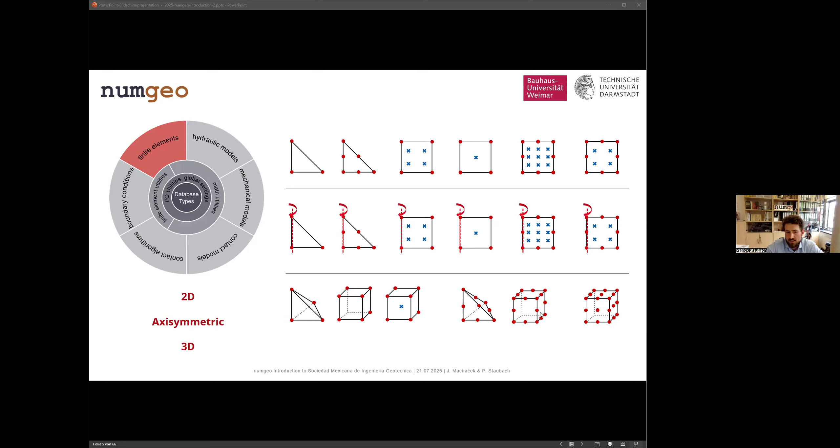For some simulations, reduced integrated elements are favorable. They are also faster, and those elements can then also be supplemented with hourglass stiffness in order to counteract any zero energy modes. On the 3D finite element formulations, we have tetrahedric elements, and we also have hexahedral elements with different interpolation order.

The second important part for geotechnical engineers next to the element formulation is the mechanical modeling that we offer. So we offer a wide variety of constitutive models to be used.

Here at the top, we start with very basic models. Of course we have linear elasticity, and we also have Mohr-Coulomb in various implementations. We have modified cam-clay models, and all the basic plasticity models that are used particularly in practice.

But because we are also a research code, we have more advanced constitutive models. In particular, in Europe, hypoplasticity is very commonly adopted. We have it conventionally with the intergranular strain extension and also with the more recently developed ISA extension.

And then we also have partly the Sanisand family. The Sanisand family nowadays is quite large. We have the basic model from 2004, but we also have more recent developments of that Sanisand model, particular for cyclic and also semi-fluidized states.

And finally, there's also a particular hypoplasticity implementation for unsaturated soils. This was now the advanced constitutive models for non-cohesive soils. In the green box, you see those models for cohesive soils.

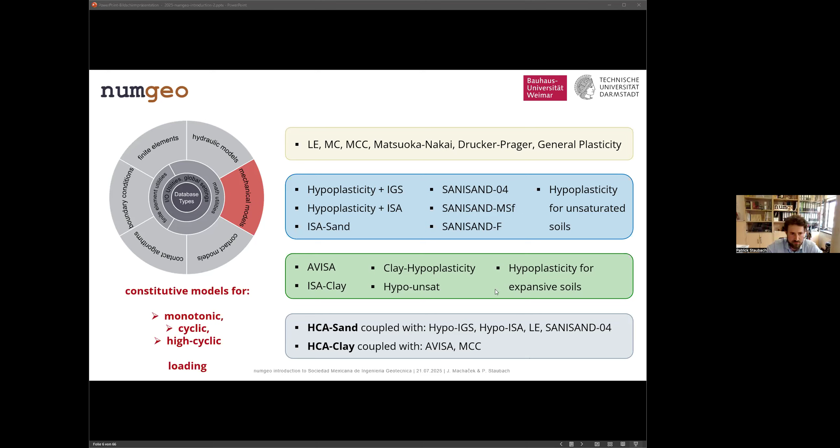The next thing that I want to discuss are hydraulic models, which you would need when it comes to modeling of unsaturated soils. In this case, you have to describe the soil water retention curve, and we have a number of models which you can adopt to supplement this constitutive relation. At the same time, you have to account for a relative permeability. So if you have unsaturated conditions, the hydraulic conductivity of the water through the skeleton will be lower, and there are also a number of models to consider this.

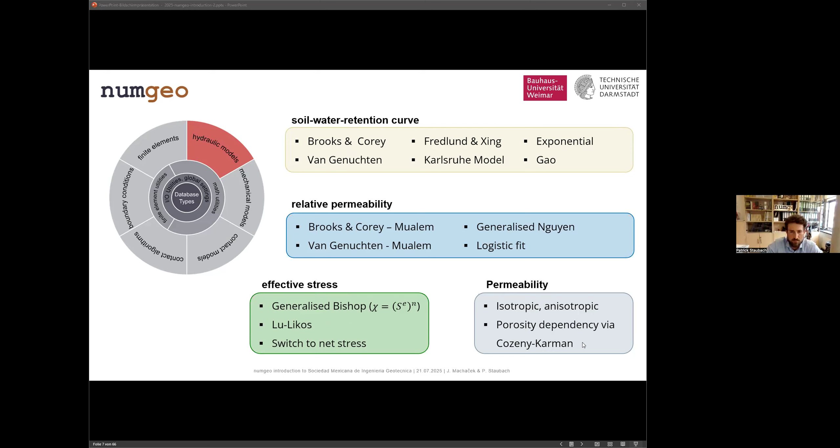And finally, you also need to account for the effective stress formulation if you have unsaturated states, to account for suction. There are also a number of models from which you can choose in that software. Finally, in terms of permeability in general, we have implemented a porosity-dependent equation by Kozeny-Karman to account for a reduction of permeability if, for instance, porosity decreases when you have some volumetric strain leading to compaction.

Important aspect of finite element simulations are interactions. So we do allow in NumGeo that multiple parts of your computational domain are interacting with each other. And we allow for large deformations between objects and also arbitrary meshes between the objects. So we are not like Plaxis limited to very simple spring interaction between nodes with some discrete interface elements, but we have state-of-the-art contact discretization methods for this.

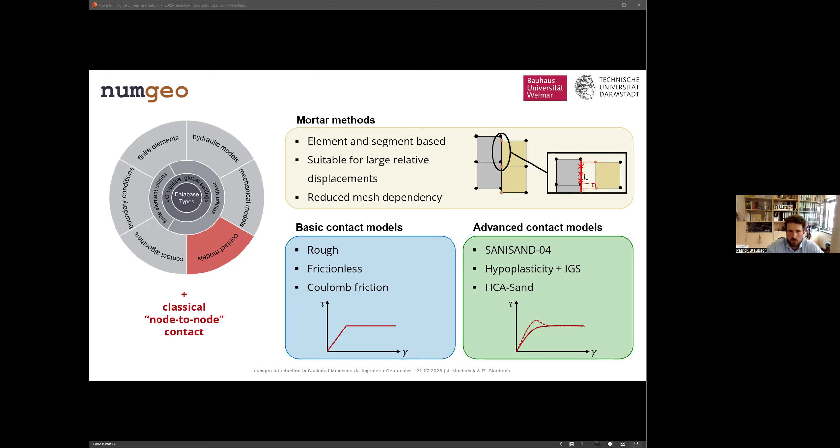Finally, we also want to say a few words about boundary conditions, but we don't want to cover it all here. We only want to highlight a few aspects of the codes, because boundary conditions are quite a broad topic.

What we offer built in is the generation of random fields. They follow a Markov correlation. What you give is basically the minimum and maximum value of some field that you want to spatially distribute, and the correlation range. The correlation range basically determines, over a certain distance, how large the correlation is of the values that you are distributing.

We have that built in, but we also have it externally by means of Python codes, so I will come to that in a second. With NUMGEO, you can also read in arbitrary initial conditions. You could generate these random fields with an external script, say a Python script, and then import it into NUMGEO.

The Python scripts that we are also offering allow a little bit more flexibility, for instance cross correlations, if you want to link the friction angle somehow with the initial density.

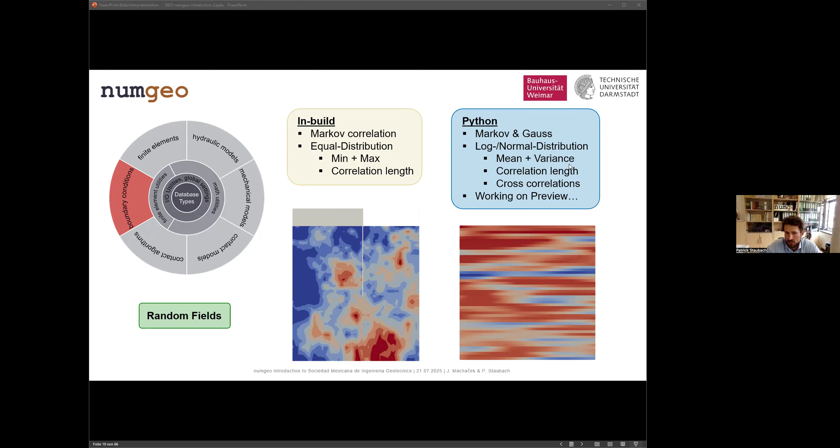If all of this is not enough for your application, we do allow you to modify the code with user subroutines. User subroutines allow you to basically program your own code and have it incorporated in our pre-built program. Let's have a look here at which routines you might want to modify.

We offer the modification of the material. You are allowed to completely code your own user mechanical model, and the interface, if you are familiar with Abaqus UMAT, is very similar to that interface. It's also possible to link it with user subroutines that have, for instance, been programmed in Fortran.

You can also do that for unsaturated conditions, and you can also implement your own user contact properties. For instance, if in one part of your model you want to use a different contact friction angle than in another region of your model, you can do that very flexibly with user contact properties, where you have some dependency on coordinates.

An important aspect is the initial state conditions. We allow users to define initial states, initial stress, initial void ratio through user subroutines. For instance, consider the initial stress conditions on a slope. We don't have a pre-built initial stress condition for that. You could basically apply gravity and then the stresses will come into equilibrium, giving you a stress distribution which is in initial equilibrium. But you might also want to initially define the initial stress conditions for a slope, for which you could use this user initial stress routine.

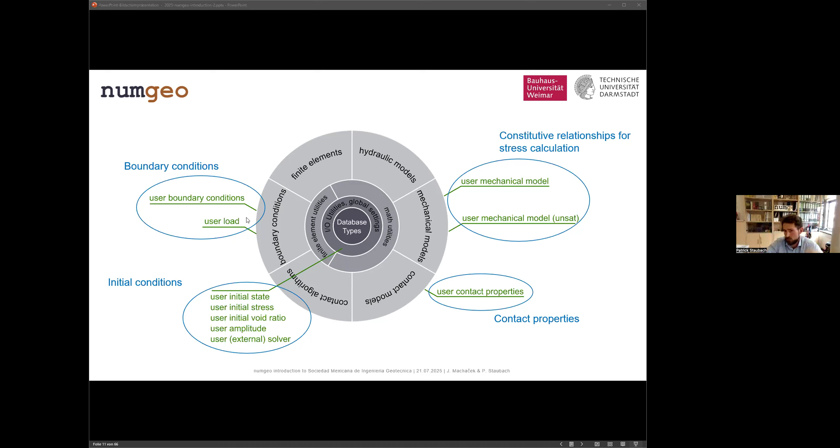Now let's come to the actual application of the software. As it currently is, we are offering the software for Windows and also for Ubuntu, where more Linux-based operating systems are pending. In Windows, you have two different options to adopt the software.

We offer a portable version. The idea is you don't have to install anything. If you download it from our website, you get an executable, that's the NUMGEO software, and we ship a number of DLL files with it that you need to execute NUMGEO. There are about 10 of these DLL files, and they have to be located in the calculation folder where you execute NUMGEO. If you get tired of always copying the executable together with the DLL files, you can also put a system variable in your system path so Windows always finds them directly.

This portable version is very nice because you don't need to install anything, and it doesn't require any space on your system. The shortcoming is that the user subroutines I presented on the previous slide require a compiler. If you program something, you have to compile it in order to have it read by NUMGEO. In this case, you might use an option like MinGW, which works as well, so you could compile these user subroutines with MinGW and then NUMGEO can read it. But if you don't have that, you cannot use user subroutines.

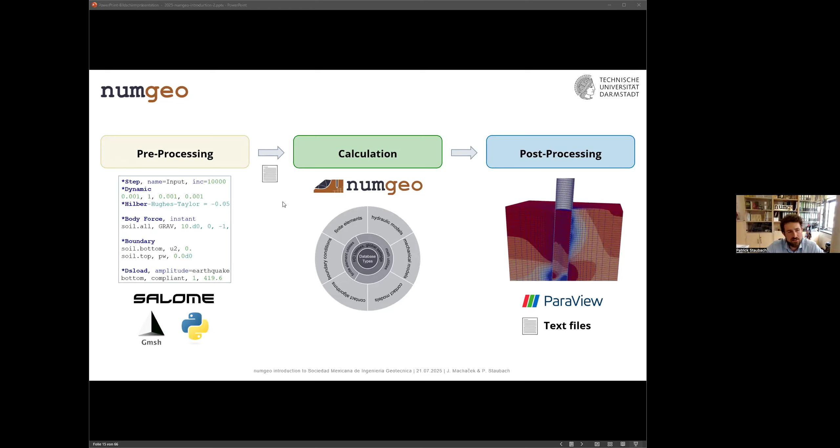We know that this kind of pre-processing can be unhandy, which is why there is NUMGEO GID. You might be familiar with GID - it's a very powerful CAD and mesh software, and it also allows you to incorporate program-specific commands and keywords into the software.

So what was done is that in GID there's a program type which is NUMGEO. From our website, you can download this program type and incorporate it in GID, and then in GID you can do a guided pre-processing. I'll show in a second how that works.

The rest of the steps remain the same, but you can do the simulation or calculation directly from GID. You can start the simulation in GID, get information about how your simulation is going, and at the end, you can also visualize it with GID.

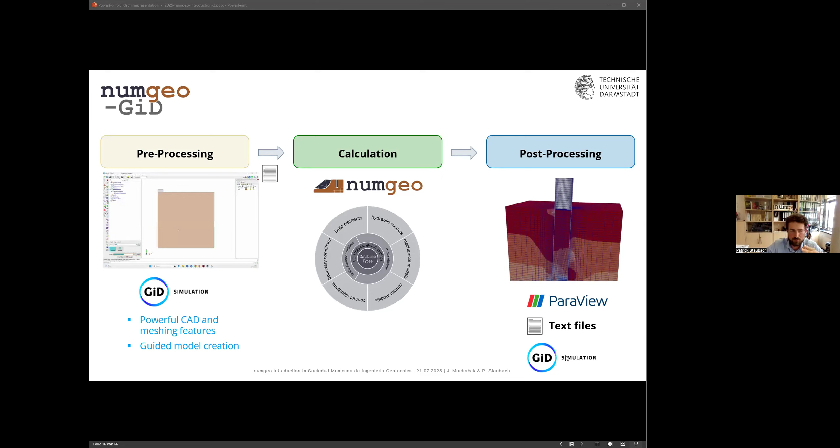Here is the program interface from GID, and you have different sections of that interface. You have the data tree, and in the middle, in the sketch area, you have the model you have generated. GID works with layers and groups, which you can activate and deactivate - for instance, to deactivate the soil here to only have a view of the pile area.

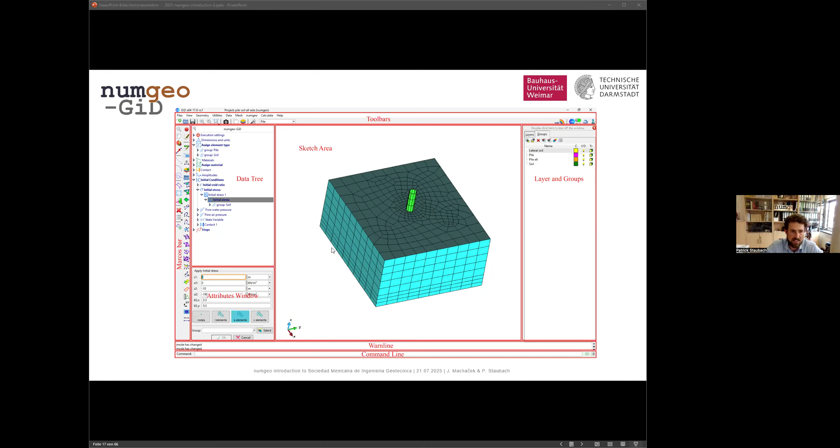In this data tree, you are guided through the generation of your finite element model - all the steps we've discussed now from an implementation point of view, so for instance element type, material assignment, it's all guided. You cannot do as much wrong as during this input file setup.

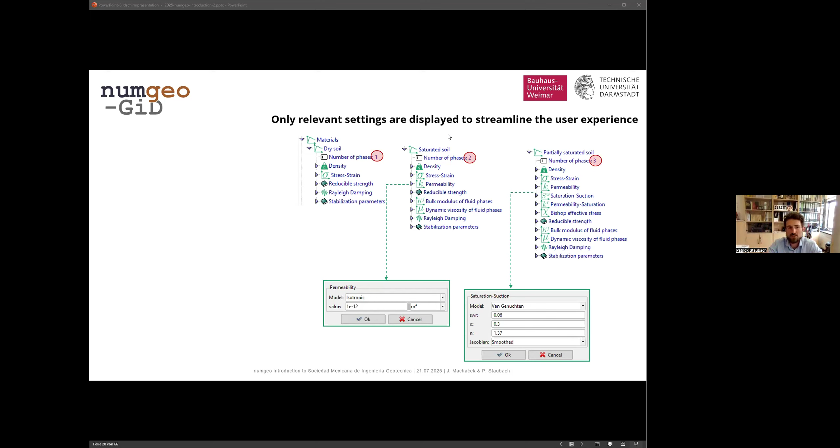Each individual topic has smaller sections where you can do a lot of fine-tuning of the different settings, and this really enhances the user experience. Only relevant settings are displayed at the beginning in order to streamline the user experience, so you're not faced with hundreds or thousands of options without knowing if you have to fill them out or not. At the start, it's all streamlined for the user.

Then you have assisted generation of material definitions and initial conditions, for instance. Here's an example: if you've picked hypoplasticity plus intergranular strain as the constitutive model, then the list of parameters you need for that constitutive model is given to you directly, so you're not missing to define any of these parameters.

There is also transparent access to more advanced settings, like if you want to change the solver selection, or what you probably want to change very rarely, the convergence criteria. It's modifiable, but technically you never really need to modify the convergence criteria.

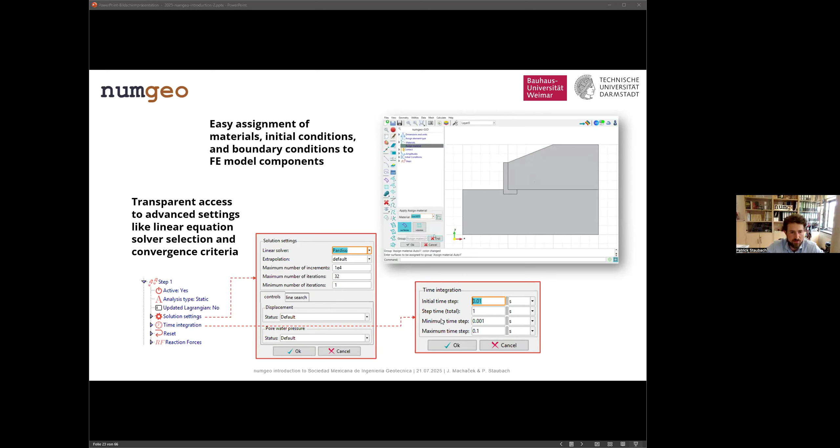Now in August, mid of August, we are planning a new release. For instance, in this release we will include structural elements. This is a very basic feature which we didn't have up to now. So beginning with August, there will also be structural elements available. There are general modifications, and there's also more content added to the manuals, and normally there are also some bug fixes, which we report there.

You can find the full release history also in our documentation. So for each of these years and months, there's a list of changes which we did to the software, so you can keep track of the changes that we did, and maybe you also need to react to those changes when you download a new release but want to use old input files.

Now let's come to some ongoing developments, particularly with an aim on research. The idea here is also to show you some capabilities of the software that we currently have, and then we will follow that with application examples.

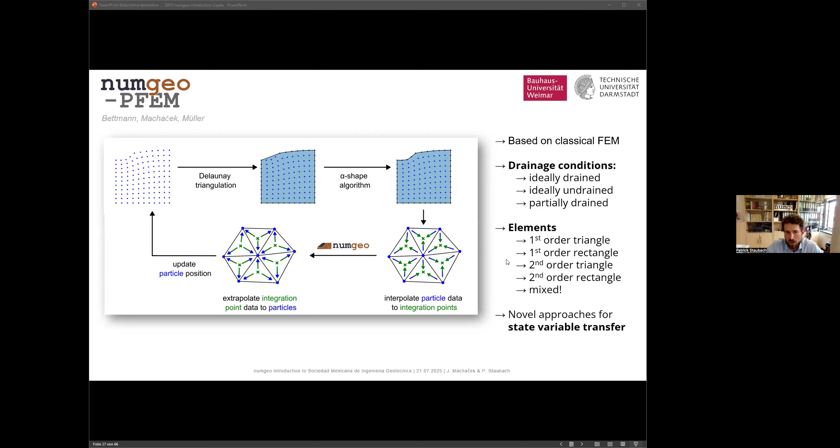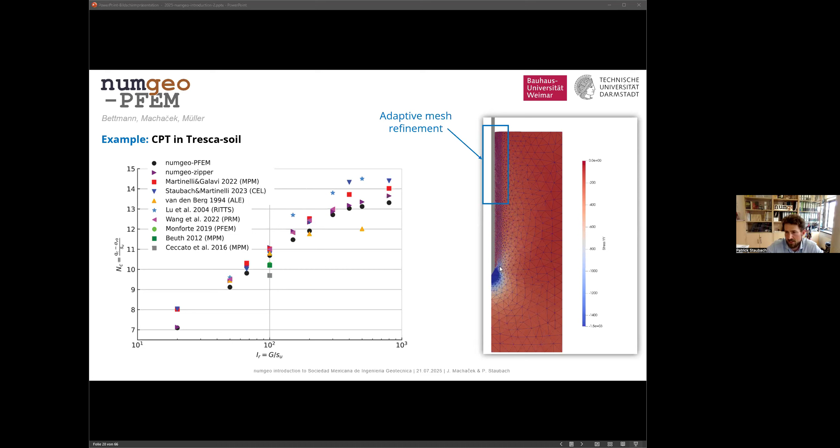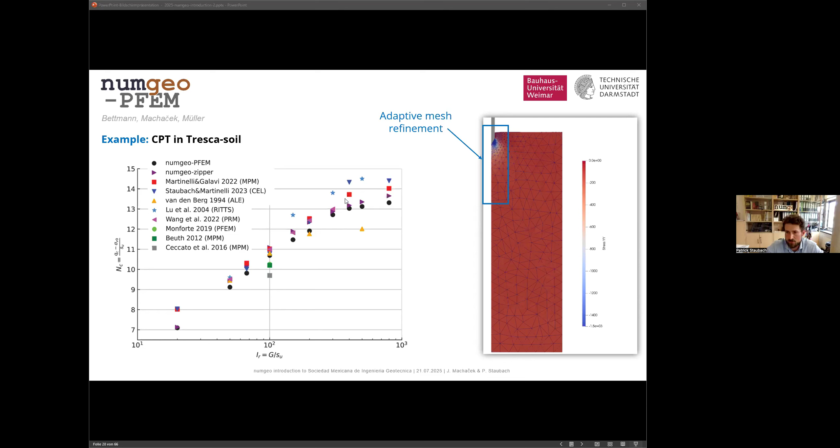And here we have plotted a number of researchers with various codes for large deformations for this type of simulation. We compared the PFEM method with the so-called zipper method, both implemented in NUMGEO, with various other solutions. The zipper method I will introduce later; it's also performed in NUMGEO, and it's another way to simulate this problem where no remeshing is performed. We compared that with the material point method and also the coupled Eulerian-Lagrangian method, and found very good agreement between the NUMGEO solutions and the other codes.

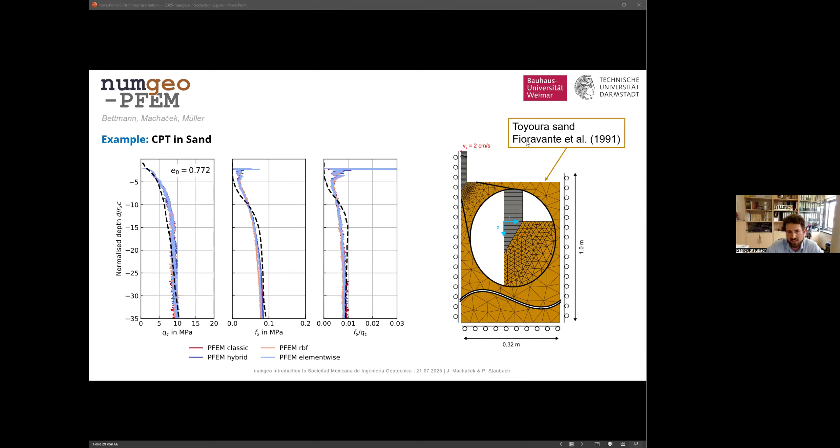Here is a comparison for the cone penetration test in sand. We see here with depth the cone resistance qc and also the friction ratio Fs, and the different implemented schemes for the PFEM method are compared, and they all have very good agreement with model tests from 1991, as depicted here on the right side.

Now coming to a totally different topic. We are now moving away from the PFEM to NUMGEO ACT. ACT stands for Automatic Calibration Tool, and it's a software used to calibrate constitutive soil models. It calibrates the parameters of constitutive soil models by means of an optimization algorithm, so it's completely automized in the way that the software tries to find an optimal solution for the parameter set.

Here it's displayed how this works. You need to have your experiments, of course. The experiments could be odometric tests, drained or undrained, monotonic or cyclic triaxial tests, or they could also be shear tests. Then we first adopt some constitutive model - it's more or less arbitrary what you pick here. It could be hypoplasticity, it could be Sanisand.

We first estimate a set of parameters, perform a simulation of the tests in the data bank, and then compare the curve from the simulation with the test from physical testing. Then you need to quantify the difference between the simulation and the test. There are different ways to quantify that, and a number of different methods implemented in this ACT method. You then calculate a weighted error, and eventually set some error tolerance. If your current error is below the error tolerance, you have your final set of parameters, and hopefully it fits very well. Otherwise, you have to optimize the parameters.

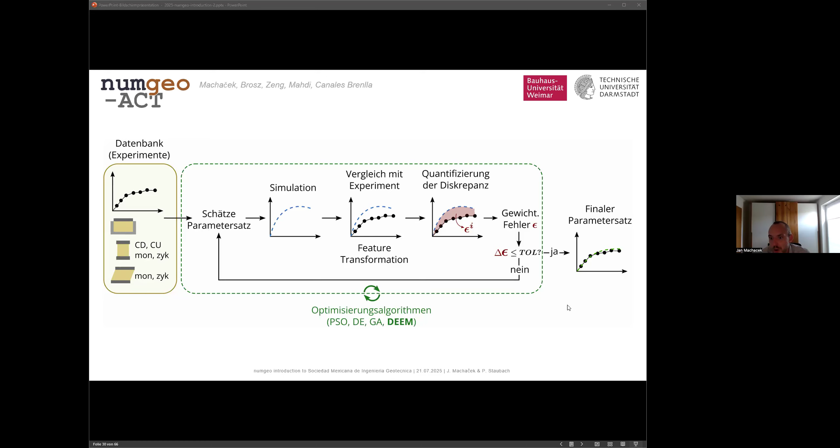So if the calibration or optimization algorithm finds a suitable parameter set at the end - this is determined, for example, if we fall below a threshold in terms of the cost function value, denoted here with delta epsilon - then we deem the calibration to be finished, and we think that we found an optimal parameter set. So now you could switch the slide, please. We have one example for you to showcase that a bit. If you go back, please, one slide - that was one too fast.

For one specific material, a fine sand, we have multiple tests: an odometric compression test, drained monotonic triaxial tests, undrained monotonic triaxial tests, and cyclic undrained triaxial tests. For each test type, we have multiple different experiments.

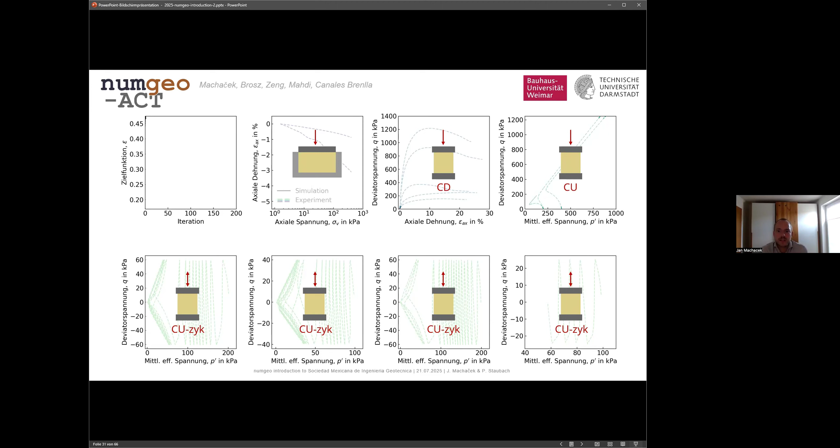Now we are looking for the one parameter set for the hypoplastic model that fits best all of the experiments. This process is shown on the next slide, where you see the progress of such an automatic calibration, with the drop in the cost function.

The cost function quantifies the difference between experiment and simulation. Simulation results are given in black curves, and experiments are given in dashed colored curves. A high cost function value denotes a rather bad fit between experiment and simulation, and the lower the cost function gets, the better the agreement between both.

At the end of the calibration process, we have quite a good agreement for monotonic tests like the odometric compression test, but also for the cyclic tests given in the bottom row. Now obviously this is the element test level, and the question is how well do these automatically calibrated parameters perform in boundary value problems? That is shown on the next slide.

We tested this approach on different boundary value problems of different complexity. The first box shows the monotonic horizontal loading of a single pile. The second box shows an embankment of saturated sand excited by an earthquake loading at the base. The third box on the right-hand side gives a sheet pile wall, also loaded by an earthquake loading.

In all three cases we performed numerical simulations. The black lines in these plots showcase the measured data from the experiments, and the colored lines give the simulation results. For example, for the single pile, there are multiple simulation curves, because we repeated our approach for the whole calibration up to 50 times to see if our approach is robust in terms of the prediction.

For 50 different calibrations, we get nearly the same result in terms of the predicted outcome in the boundary value problem, which shows that the framework and the process we developed here is rather robust.

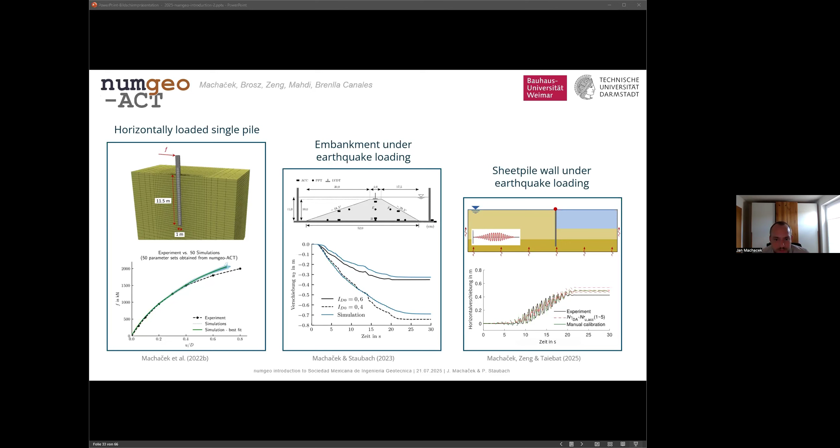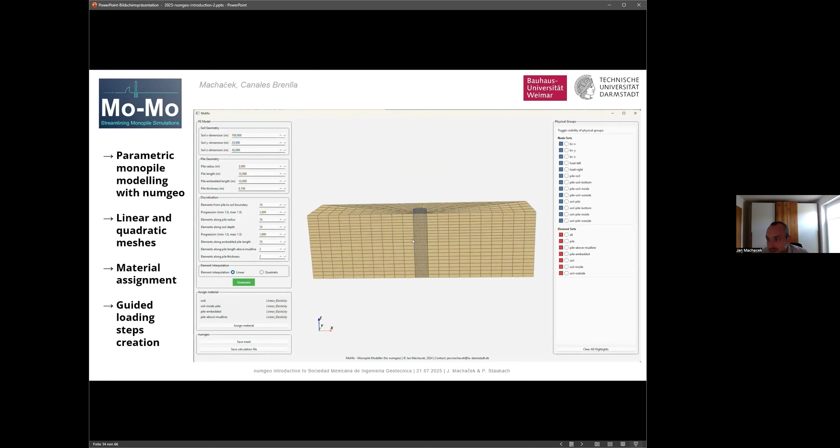As you might have seen so far, the NUMGEO framework was developed in terms of text-based inputs. We started also interfacing it with the GiD software for graphical pre- and post-processing, but there are some tasks that can be further optimized, for example for monopiles, especially in the context of offshore geotechnics.

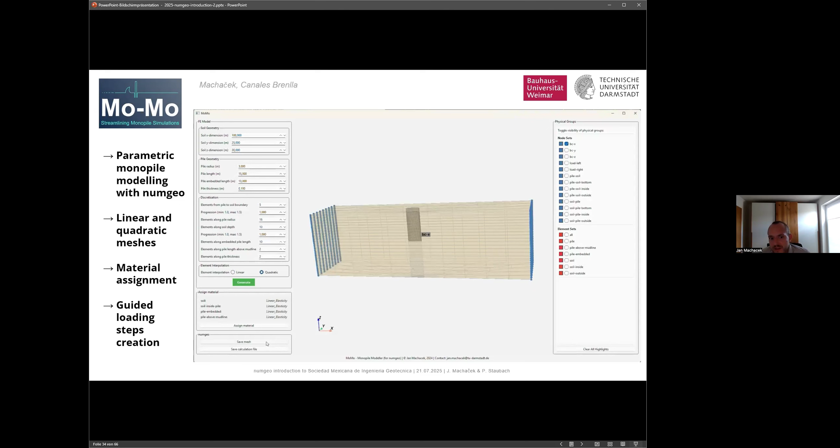We are interested in how the pile deforms under several thousands of loading cycles, maybe up to millions. In this case, the numerical models themselves are, geometry-wise, rather simple, but creating and meshing these models might take some time. So we created an application that allows you to do that parameterized, and to quickly, in a matter of minutes, create such models for monopiles.

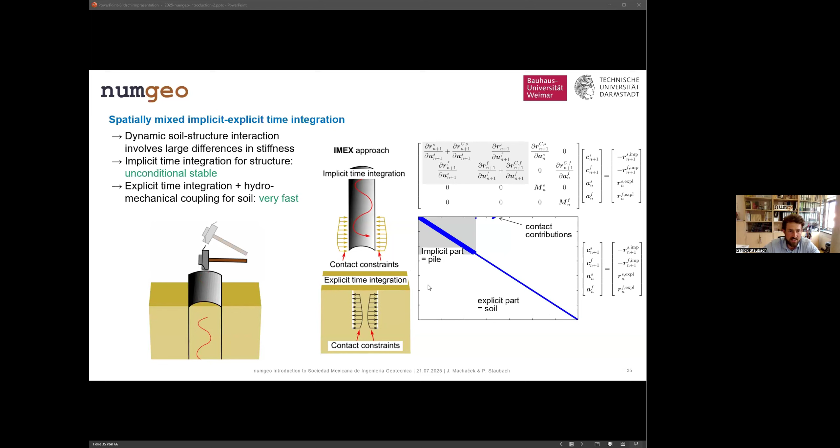We have compared the solution of this IMEX scheme for dynamic pile testing, and we found very good accordance between full implicit time integration and this IMEX approach, both in pile displacement and in pore water pressure distribution or development in the soil. The speed up is a factor of 10 to 100 compared to a full implicit simulation.

What are further applications? This is not only relevant for pile dynamic loading, but also if you want to simulate earthquake analysis with soil structure interaction. This comes in really handy, and you can consider the self-deformations of the structure in the soil.

And in general, for large-scale soil structure analysis, one should really consider relying on explicit solutions, because they are so much faster - the solving process literally takes no time.

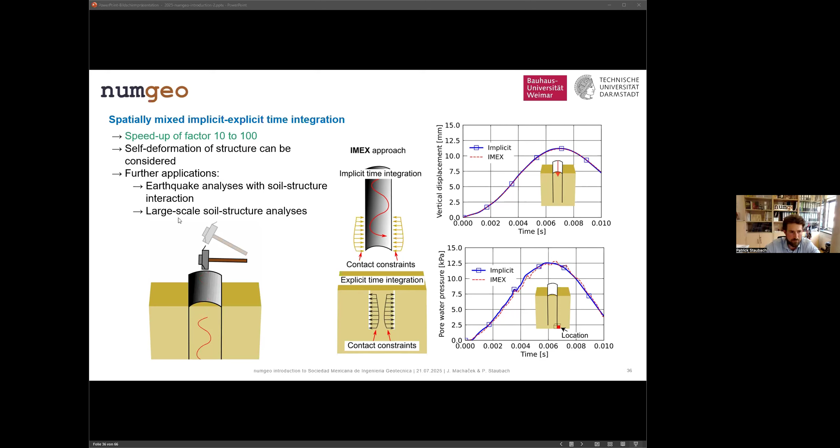Then finally, in NUMGEO you can also do some kind of discrete analysis. We have not implemented a conventional DEM algorithm, but we have implemented a so-called finite discrete element method.

In the finite discrete element method, we make use of those sophisticated contact discretization schemes, the mortar methods that I introduced earlier. They allow so much flexibility that you can technically perform such analysis with a very large number of particles interacting with each other.

But each particle is individually connected with finite elements. So basically, it's a finite element analysis with a lot of individual particles interacting through contact discretization schemes. Why do we do that?

Well, you can model arbitrary particle shapes, as you see here in the animation, and you can also adopt constitutive models for your particles. The particles can have plastic deformations, and they can have some effects of grain crushing also incorporated.

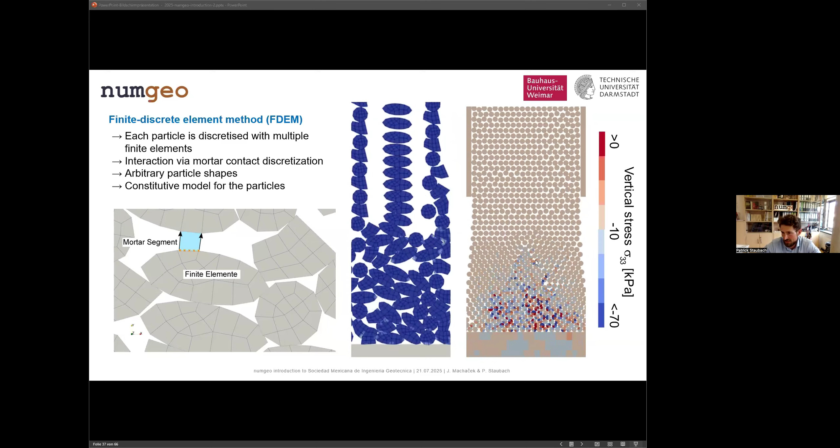And we are analyzing stresses. Here on the right side, you see that in a simulation with thousands of particles, we can analyze stresses in particles, which is very attractive for the interpretation of lab tests, for instance.

Now we want to come to more application examples to further show you the capabilities of the code. First, we want to introduce some back analysis of vibratory pile driving that we did.

Then we adopted the different finite element formulations we have implemented in NUMGEO. I initially introduced the UP element formulations, and I said they are lacking some of the features of the UPU element formulation. In this case, the problem with the UP element formulation for this particular boundary value problem is that it neglects the relative acceleration between solid and water phase, and this is very relevant for high frequency problems, as in vibratory pile driving.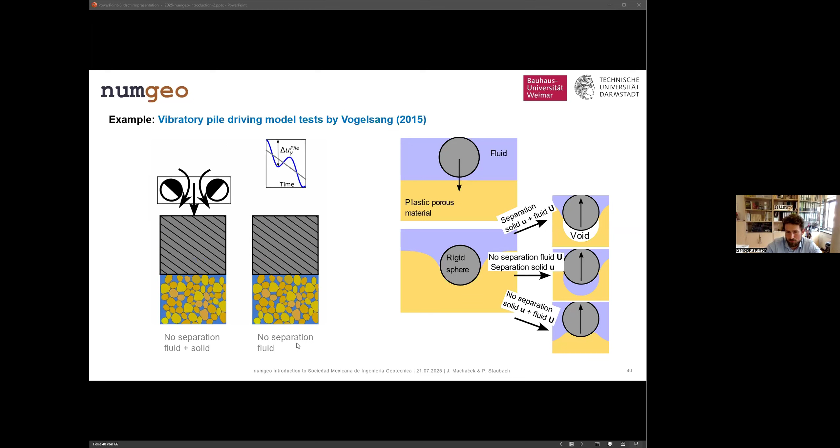For this, we have implemented a multi-phase contact formulation where you can enforce only the water to not separate from the structure. This actually matters a lot for the simulation, for instance, of vibratory pile driving.

Here we see again the pile displacement with time of vibration for the first 12.5 cycles. Our simulation in red, where we enforce the correct contact conditions, converges very well and fits the experiment reasonably well. The simulation where we consider no separation conditions between the fluid and the solid, which is what you could do with all software out there, does not converge well.

We can also show micromechanically, on the right side, that enforcement of the contact constraints matters a lot. We see around the pile tip incremental deformations of the solid grains, obtained with high-speed camera. During the uplift phase, these colored lines show the displacement that the solid grains undergo. The formulation where we coupled grains and water at the pile overestimates the solid displacements, but it does not in the case where we only couple the water phase, because there the grains aren't forced to move upwards with the pile. So it is a modeling choice of great relevance for some problems.

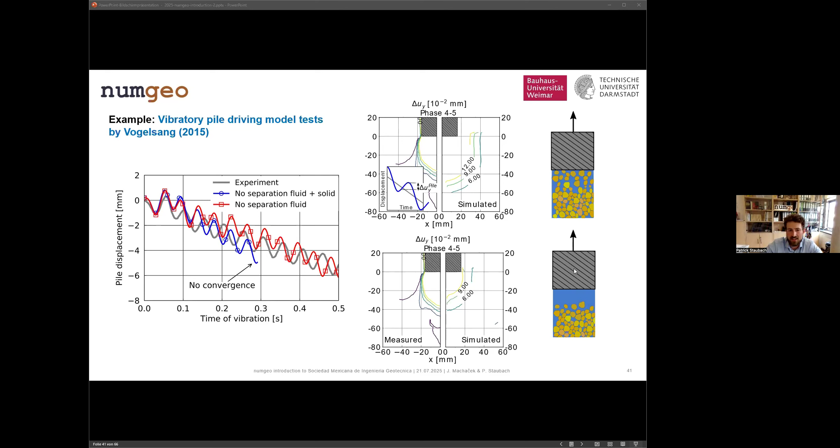How do you account for multi-phase interfaces? This is something you can do with the software. It's also relevant for suction caisson foundations for offshore wind farms.

Here, the suction caissons, when subjected to tension, also lift up. And once again, we have the question of how to model this uplift. Conventionally, with UP element formulation, you can only consider that the mixture moves up with the suction caissons. But in reality, a water gap forms, and you can consider this with the UU and UPU element formulation.

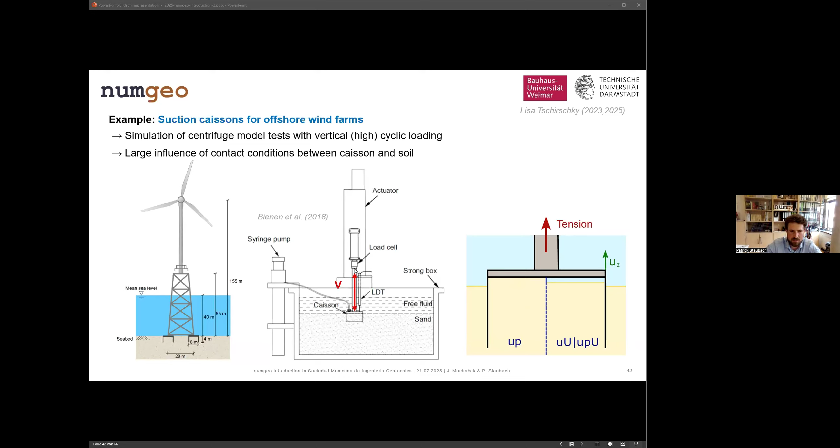We can show that only with the elements considering this gap formation are we able to somewhat predict the results of the centrifuge test. With the UP element formulation, you are not able to get that uplift behavior correctly during cyclic loading with thousands of cycles.

Another application, which I will only go briefly over, is ground improvement by deep vibratory compaction. We do this very often, particularly here in Germany, where loose granular soils are compacted with such a vibrator. It's a very complex problem where thousands of cycles are imposed with this vibrating probe. With the HCA model for high cyclic loading in NUMGEO, we established a numerical model with which we can model the full process of deep vibratory compaction, estimating the densification and the area of densification around such a probe.

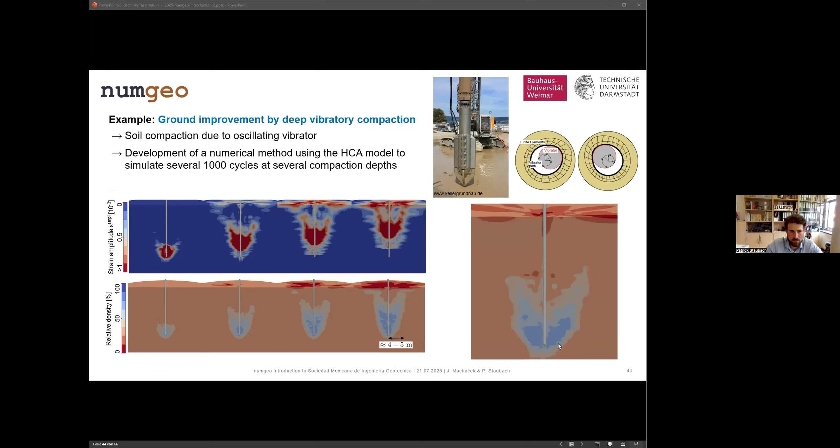To show you the application of discrete modeling in NUMGEO, we are simulating the installation of stone columns with this method, whose advantages I have already explained. The idea is that the installation of gravel into soft clay considers the installation process, where the method allows the particles to interact with the surrounding continuum, which is the weak soil. For the weak clay soil to be improved, it does not make sense to model it discretely, so we only model the particles discretely.

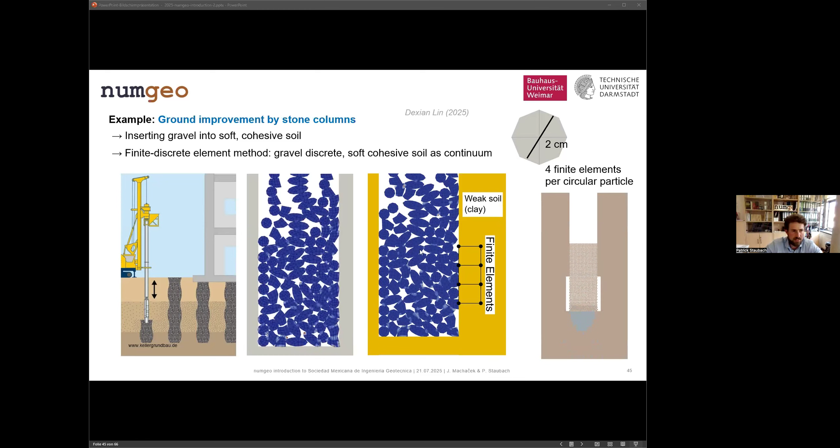What we also do with NUMGEO is modeling of infrastructure loading, for instance by trains. Here is a 3D simulation of train loading over a discretely modeled track, and we have millions of cycles that we have to consider here.

We consider these millions of cycles with the HCA model that I introduced initially in the presentation, and we've also compared such simulations with measurements made here in Germany.

Here's a train line, one of the most strongly driven train lines in Germany, where measurements were made over a span of 5 years. It was approximately 200,000 cycles that the soil faced, and the measurement was made alongside the layer in the soil, so we see the distance from the track and the corresponding settlement.

Because in our analysis we did not really know the speeds of the trains, we did different analyses with different speeds. Eventually we were more or less able to capture the settlement analyses that were taken between these 5 years.

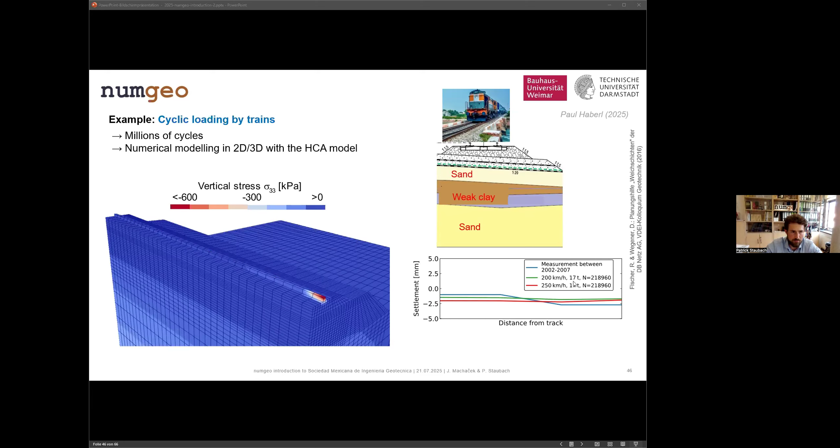Coming now more to the problems we want to discuss at the end of the presentation: Christoph Schmüdderich, who also contributed a lot to NUMGEO, did his PhD on slope stability analysis in residual lakes subjected to earthquake loading. We have this problem in Germany because our coal mining is coming to an end.

These open pit mines will then be filled with water, and we get such residual lakes. The problem is that during coal mining, the soil has deposited in a rather loose configuration, and we do have some chances of earthquakes, also in Germany. So we have to make sure, because those residual lakes are rather large, that no landslides will occur.

NUMGEO offers the possibility to do these dynamic analyses fully coupled with consolidation, with effective stresses, and Christoph Schmüdderich has enhanced this by calculating the factor of safety during this earthquake event.

He calculated this factor of safety by doing a strength reduction analysis and, during the earthquake, calculating factors of safety. Here we see during the application of the earthquake signal how the factor of safety, which is initially very large, drops because of the earthquake, and at one point it even drops below 1.

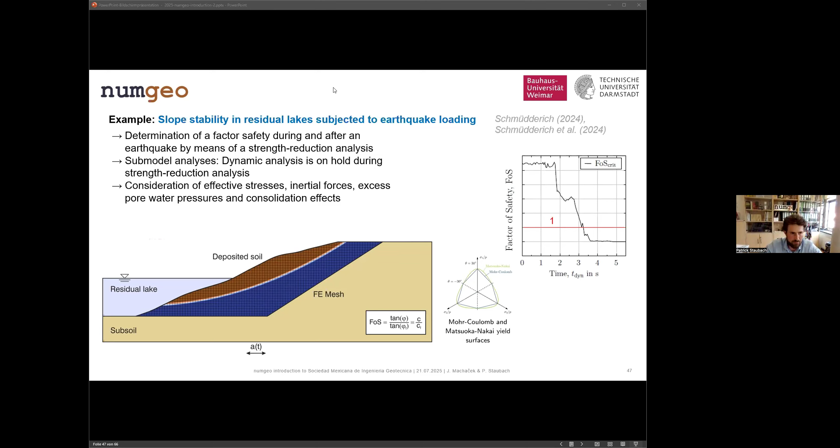In relation to the open pit mines, there are also plans in Germany to recultivate these areas by means of onshore wind farms. We've already seen that these open pit mines have deposited soil, and currently it's rather unclear how large piles for onshore wind farms act in these very inhomogeneous soil conditions, especially since generating these artificial lakes takes tens of years.

We also have very long consolidation times of these soils, so technically we need to build these foundations while consolidation isn't even finished. What we do numerically is estimate the lateral loading of the foundations of the onshore wind farms due to wind loading, while also considering the consolidation procedures in the soil and the inhomogeneous soil conditions.

Here, these different lines correspond to different soil configurations. We tried, for instance, clay layers only and sand layers only, which gives you the lowest rotation, and then in between it depends a little on how these patterns of clay and sand are located.

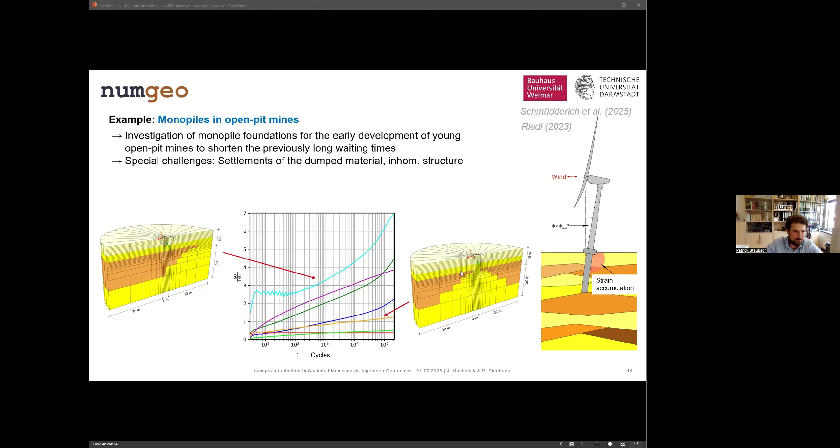In terms of validation, we also simulated a centrifuge test on soil subjected to earthquake loading with a foundation on top. We compared, at a certain depth, the excess pore water pressure developing during this earthquake loading. The idea was once again to show the advantages of our more sophisticated element formulations compared to the UP element formulation.

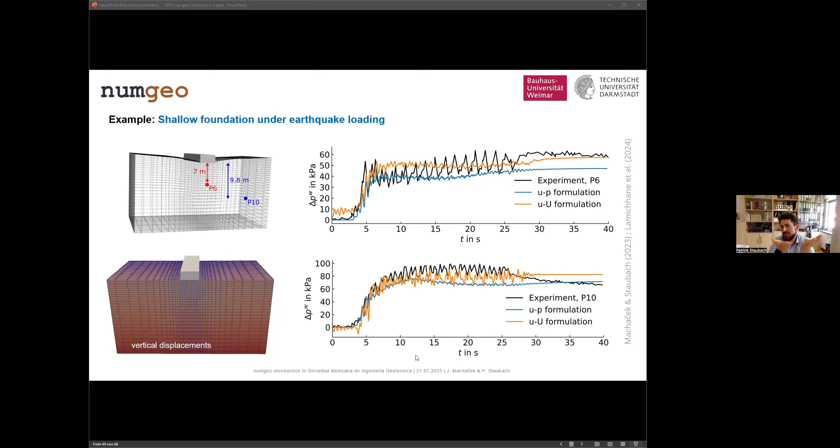We do see some differences between the full UU formulation and the simplified UP element formulation, but overall the discrepancy is small compared to the experiment. In the animation, you can also nicely see that we can simulate the sliding of the foundation on top of the soil.

Then we come to our final topic: strength reduction, and I hand over to Jan. We're approaching the end, but this is at least the final topic, and it's one that was especially requested when preparing this presentation.

The question was about how, or if, we can treat stability analysis in NUMGEO, and how we do it, especially when groundwater flow is to be considered. Like most geotechnical finite element software, we can perform stability analysis, and we do so using strength reduction.

We determine something called a factor of safety, which quantifies the safety margin of a structure by iteratively or successively reducing the shear strength parameters, namely the effective friction angle and the cohesion. We then determine the factor of safety as the ratio of the current, reduced shear strength to the shear strength at failure.

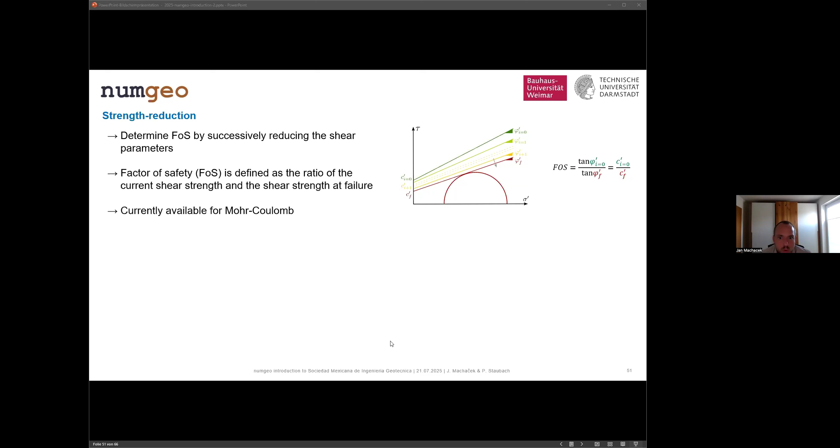In the current version, strength reduction is only available for Mohr-Coulomb, so simple elastoplastic models. We are working on porting it to more complex models, but that's the current state that is distributed.

In order to find the critical factor of safety, we use an iterative process. We start with an initial factor of safety, for example assuming it is 1, meaning our system is stable at the beginning. Then we incrementally increase the factor of safety step by step with small increments.

As soon as we reach a point with no convergence, meaning we don't find equilibrium for the current step, we don't abort the simulation. Instead, we go back to the last converged stage, reduce the increment in the factor of safety, and retry that increment once more.

In the example here, it fails again, so we reduce the increment once more. We go back again to the converged state and use a much smaller factor of safety increment in the next step. Then we might be lucky and achieve convergence, finding equilibrium in our system, and we can increase the factor of safety further.

This iterative process continues until the increment in factor of safety falls below a given tolerance, for example 10 to the power of -4. Then we say we are accurate enough, and the final value of the factor of safety is our simulation result.

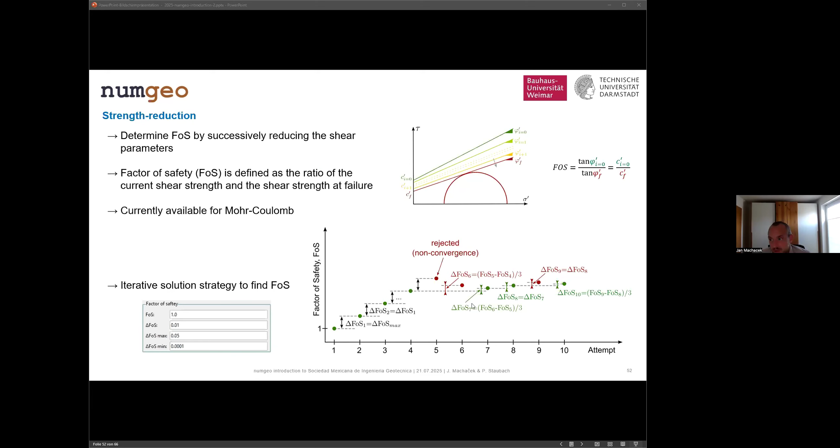We brought two examples for this process, both involving groundwater flow. I have to say that all of these examples were simulated and investigated by a large group of people—mainly, let's say, the counterpart of the Mexican Geotechnical Society: the German Geotechnical Society.

There we have a subgroup, or working group, called Numerical Methods in Geotechnical Engineering, and within it a subgroup that concerns mainly geo-hydromechanical interaction. So there are a lot of people using different software, all analyzing the same issues.

The first example is an embankment of a reservoir that is initially saturated. We have a high initial water level in the reservoir, but then a rapid drawdown in water level occurs. We're interested in how the factor of safety of that slope develops during this rapid drawdown.

We considered two different scenarios: a very fast drawdown, with a drop in water level of 8 meters in 1 day, and a slower scenario with 8 days of drawdown time. These are clearly transient processes. The phreatic surface is unknown in the simulation, so we have to solve for it, and depending on its location, we get different factors of safety.

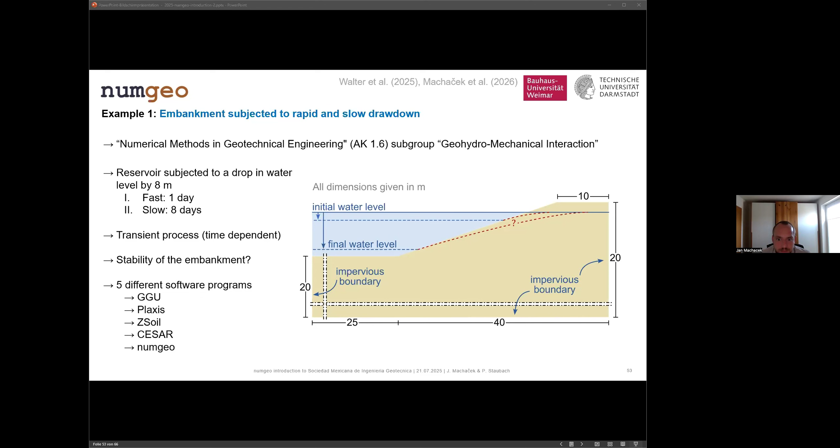But before we can see the factor of safety, we first have to look at the boundary conditions, because these are rather special in this example. To simulate the drop in water level on the embankment face, we need a boundary condition that changes not only in time but also in place, because if the water level drops, we can only prescribe the hydrostatic water pressure below the water level.

So for that, we have something we call a flexible boundary condition, that allows you to prescribe displacements and water pressure, so solution variables, depending on time and space. In the present case, it's a rather simple one.

You can see that on the bottom right of this slide, where you see three scenarios. In all cases, you see a hydrostatic distribution of pore water pressure. On the left-hand side, it is rather small. In the middle, you see that as time progresses, we have a drop of the water level, so the zero point of the hydrostatic distribution is moving in the vertical direction, and the magnitude at the base of the model as well. Then for the final time, when we reach 8 meters in this case, we have our final value.

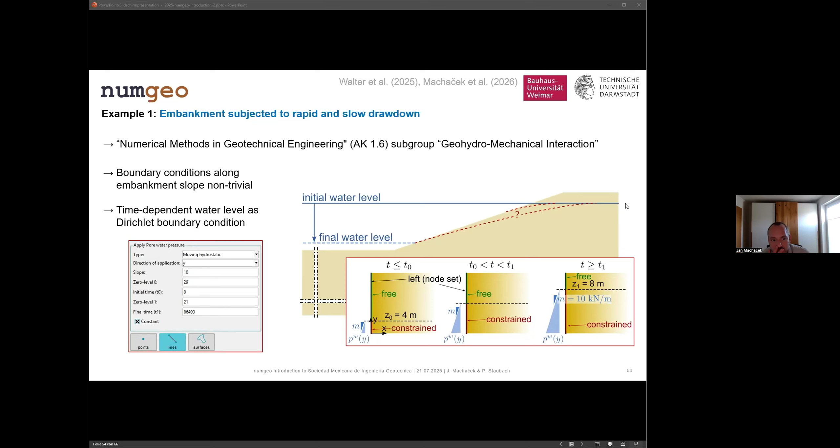Now, above the water level at any time, we need to specify some drainage conditions. You could either assume it's undrained, so the pore water pressure will freely develop, or you could assume it to be ideally drained, following the linear distribution of the pore water pressure. Or you could use an intermediate type of boundary condition, a so-called drainage boundary condition.

The drainage boundary condition acts as an iterative boundary condition. In the present case, this boundary condition will give you an outflow of water if the pore water pressure is larger than 0, or it will be closed, undrained if you want, if the pore water pressure is less than 0, so if you have such partial saturation.

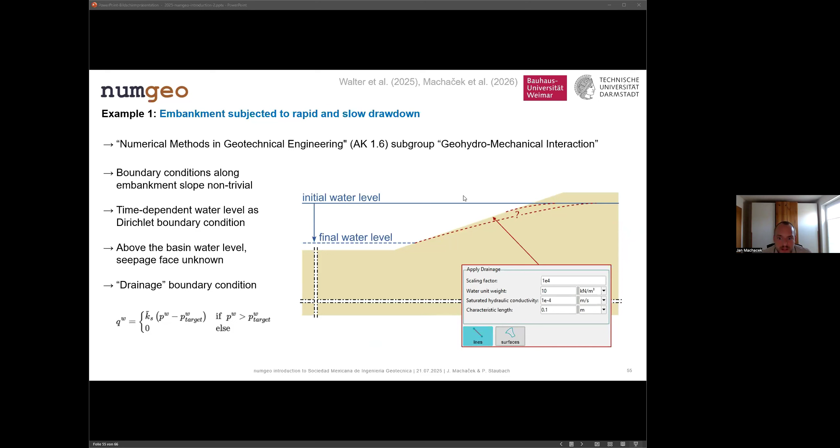And we can also see, and this is rather nice to see, that we have quite good agreement between the different software products. So all of them give you more or less the same result.

Now, after dropping the water level to 21 meters, there was a series of calculation stages added at the end: a consolidation analysis. So once we waited 1 day, and then did the strength reduction. In another one, we waited 10 days of consolidation, then performed the strength reduction. And we did so for 1, 10, 100, 1,000, and 10,000 days. The 10,000 days is the steady state that we reach after that time.

Now we can track the evolution of the factor of safety during these consolidation stages. What we see is that the differences between the different software products grow. So we don't have that very narrow band of predicted factors of safety anymore, but they are still all in reasonable agreement.

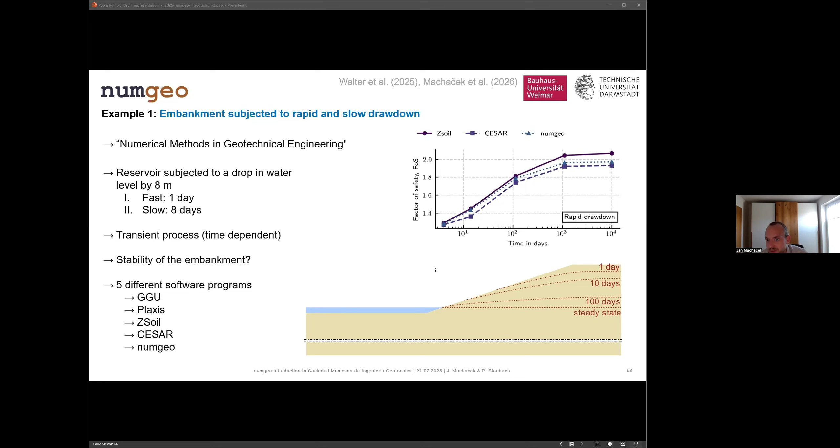So the second example we can show you here is a retaining wall, a backfilled retaining wall that is subjected to steady state groundwater flow. This example was also performed in the same subgroup of the DGGT.

We will raise the water table on the right-hand side, which we'll show on the next slide. What is maybe important to highlight here is that this time we included not only 5 software products, but 8 in total. What you can see on this slide on the right bottom boundary is the prescribed hydraulic boundary condition. We increased the water level from its initial value, which is approximately at the base of the retaining structure.

So you see the hydrostatic distribution in a dark blue triangle. And we raised that by approximately 9 meters, to an elevation of 6 meters above the initial elevation line shown here in red. Then we are looking for the steady state solution, solving for the phreatic line, and then determining again the factor of safety using strength reduction.

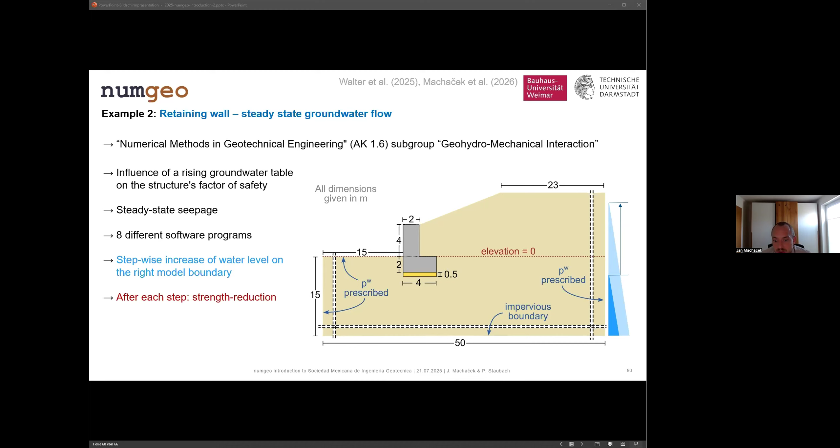If we look at the results, we find that compared to the previous result, we have quite a big scatter in terms of the predicted factor of safety. For the initial state, where the groundwater level is at minus 2.5 meters, below the retaining structure, we have predicted factors of safety ranging from 1.3 to 1.6. And one should think this is the easiest case, since we still have steady state conditions in this stage.

Then we increase the water level on the right-hand side to an elevation of 0, 2, 4, and 6 meters. We see again a drop in the factor of safety, which is to be expected, but still we have quite a large scatter between the different software products. So obviously the first question was, where does that difference come from between these different software products? There are multiple small reasons, but one is maybe a bit more prominent, and we can look at that on the following slides.

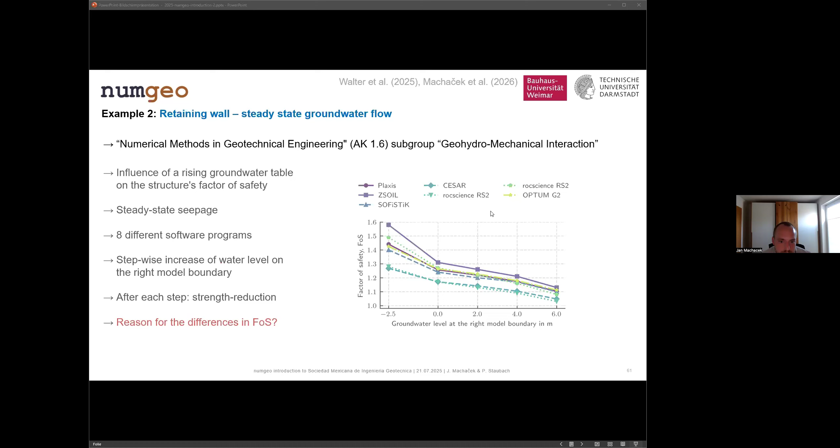So one idea was to say, well, maybe the phreatic surfaces that are predicted are different. If different parts of the model have different degrees of saturation between the different software products, it would not be that surprising if we have differences in the factor of safety.

But what we see here, if we take one specific point of the phreatic surface, just below the retaining structure, shown with that red dot on the small picture, and we evaluate for each water level on the right-hand side, at 0 meter elevation, at 2, 4, and 6, and look where this red dot is in terms of the phreatic surface, we can see that all software products give us more or less exactly the same response. So this is not really the reason for the differences that we see in factor of safety.

Now, there is one more important difference between the different software products that we became aware of, and this is how they calculate effective stress. If you calculate the effective stress for an unsaturated soil, you have to somehow define how the suction contributes to the magnitude of effective stress.

I summarized here the different approaches that are available in different software products. At the beginning, this factor chi is actually the factor that weights the contribution of suction to the effective stress. Nearly all software products allow to ignore the effect of suction on the effective stress — this is the first column that you see here. You can see that except for Rocscience RS2 and ZSoil, all products allow to disable the contribution of suction, which is on the conservative side.

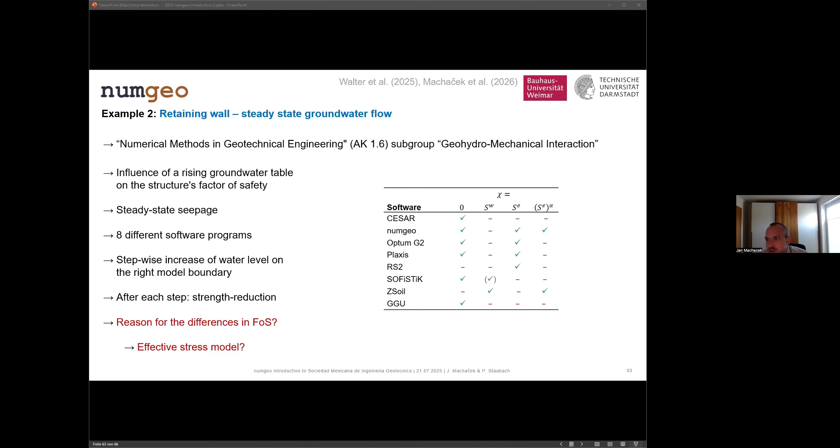But how does this affect the current simulation, and why could that explain the differences in factor of safety? Well, if we look at what this choice does to the shear strength of the soil — maybe you can go to the next slide, Patrick — I try to exemplify that here on this slide.

If you assume a Mohr-Coulomb type of material, you can translate the effect of suction to apparent cohesion. Unfortunately we don't have the equation here, but it is nothing else than the suction times the tangent of the effective friction angle, tangent of phi, multiplied by this variable chi. What we see here now is for three different approaches for the same soil water retention curve, given at the top, and at the bottom we see the magnitude of capillary cohesion or apparent cohesion.

What we can see here is that the choice of this variable, also called Bishop's variable chi, is quite significant in terms of the apparent cohesion. So if we assume that chi equals the degree of saturation, we can see that already reaching suctions as high as 100 kPa, if we exceed that, we will reach unphysically high values for this apparent cohesion.

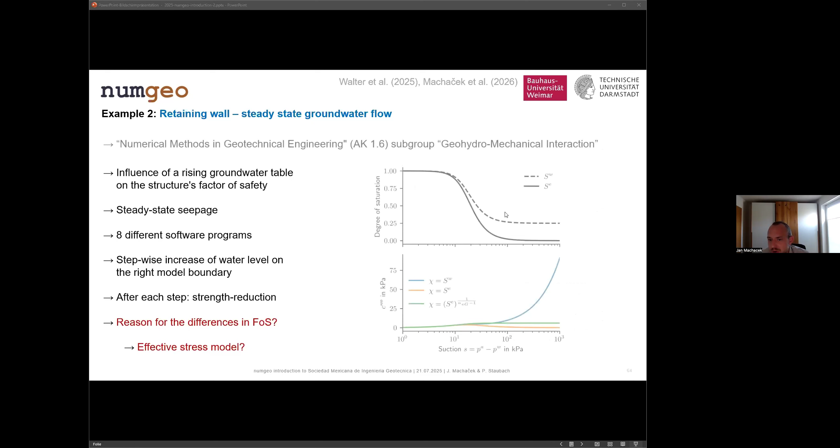This leads to an overestimation of the shear strength of the soil. Now, if we go back to the results of our simulations and look at what different approaches are used in the software. You can see the results now classed or grouped by the approach that was chosen for the Bishop's parameter. And now we can see that the scatter is reduced quite drastically.

If we compare the different approaches that we used, we see that we have a picture or a development of the factor of safety that is actually explainable. We can also see that assuming there is no influence of the suction on the shear strength, which is the blue shaded area with the mean value of the blue dashed line, gives the most conservative results, which is in alignment with the theoretical assumptions.

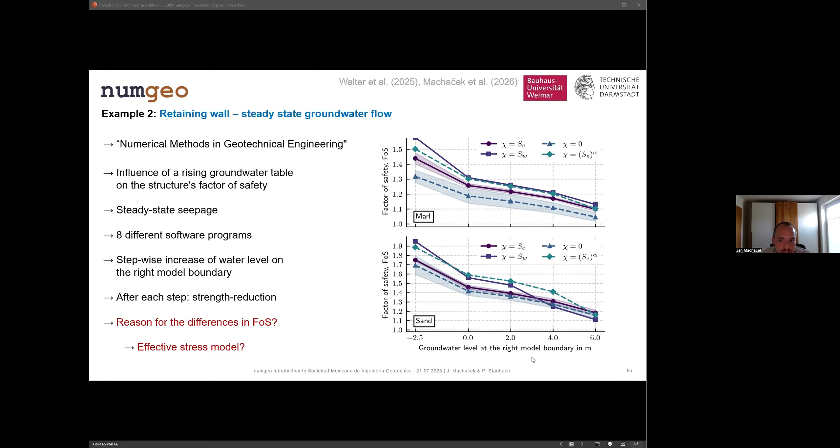So now please, next slide, because I think now we are at the end of our presentation. We hope that we could give you an overview over different implementations, the capabilities, but also maybe some applications of NUMGEO, ranging from research to more practice-oriented examples.

So thank you. Thank you both.